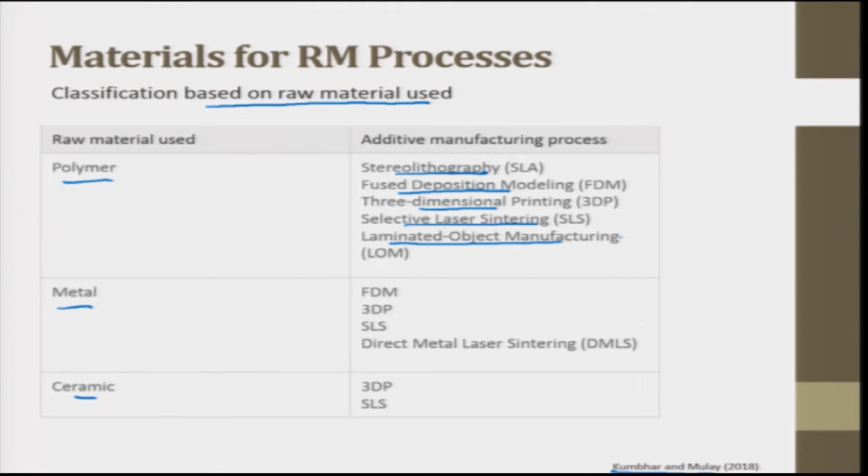This chart is taken from a study by Kumbhar and Mulay, classifying materials based on raw material used: polymer, metal and ceramic. Polymers are used in stereolithography, fused deposition modeling, three-dimensional printing, selective laser sintering, and laminated object manufacturing, where polymer sheets are used. So different processes use different kinds of polymers.

Metals are used in FDM, 3D printing, selective laser sintering, and direct metal laser sintering processes. Ceramics are used in 3D printing and selective laser sintering processes, as discussed earlier when covering materials. Glass is also used here in SLS, so glass falls in this class along with ceramics. In polymers, I can even include composites.

Next is classification based on form of raw material used: liquid, powder and solid. Liquid based processes are stereolithography apparatus and FDM. These use materials like photopolymers, acrylates, epoxies, colorable resins, filled resins, while FDM uses polymers such as ABS, polyacrylate, wax, metals, other ceramics, and PLA.

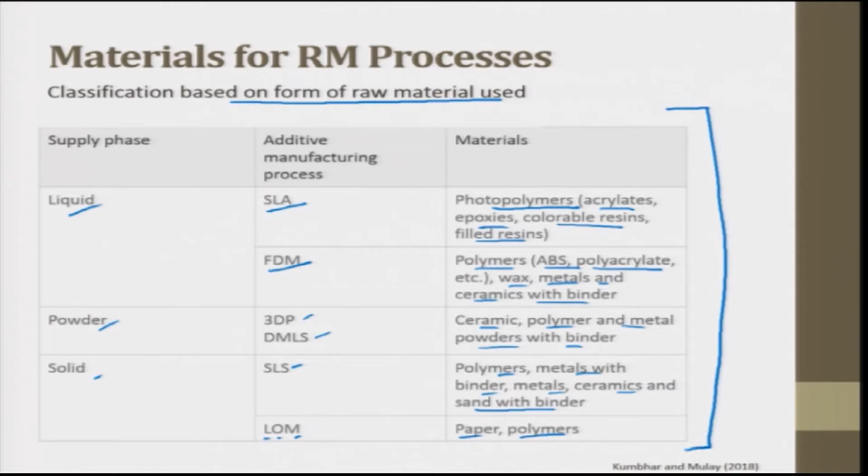In powder form, ceramics, polymers, and metal powders with binder are used in processes like 3D printing and direct metal laser sintering. For solids, polymers, metals with binders, metal, ceramics and sand with binder are used in selective laser sintering, and in laminated object manufacturing papers and polymer sheets are used. This table actually provides the information in a crisp way.

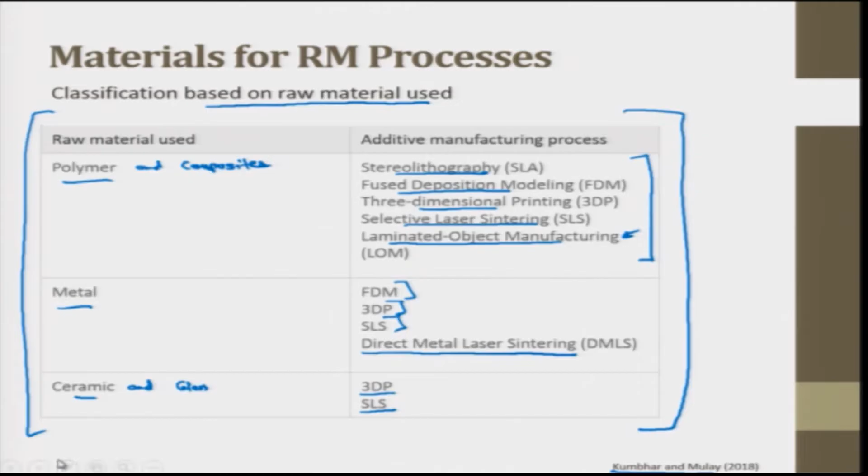Similarly, this one. This was a study taken by Kumbhar and Mulay in 2018, a very recent study.

Next, after discussing materials, let us come back to the enabling features of materials, the binding mechanisms in rapid manufacturing. These binding mechanism techniques are: secondary phase assisted binding, chemically induced binding, solid state sintering, and liquid fusion. We discussed these earlier with the different processes, but to put some light here, since additive manufacturing is only possible through efficient binding of additive layers, the binding technique determines process speed and part properties. Binding can be classified into these four categories.

First, secondary phase assisted binding, which includes adhesive additives. In this category are processes like binder jetting, SLS, sheet lamination, and LOM. These processes use a secondary phase binding material. Secondary binding phases, in the form of liquids or powder coatings, can be added using different techniques such as mixing, coating, and nozzle injection.

Adhesive additives, as 1.1, are used in binder jetting. The adhesive binder can be liquid or dry. A liquid binder, such as some polymer resins or inks, contains all the binding components in the printed liquid. In comparison, dry adhesive can also be added to a powder bed, which binds the powder either physically or chemically after interacting with the deposited liquid. So these are adhesive additives.

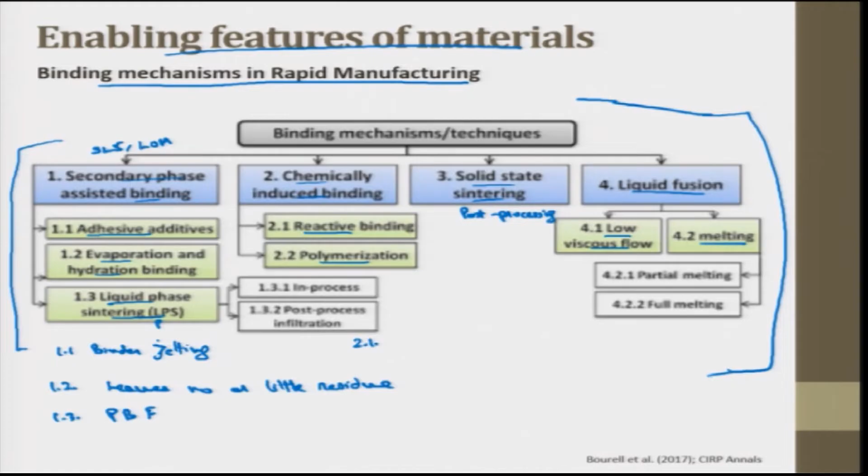This heat source can be laser or EBM. This mechanism can achieve completely dense metals from a single material. So these are certain binding mechanisms we have just recalled, which determine the strength and the type of material that can be used again.

Next, this is an Ishikawa or cause and effect diagram that tells us about all the features to obtain a final rapid manufactured part. This is also called a fish bone diagram. It looks like a fish bone. This is the main bone of the fish, and these are all branches.

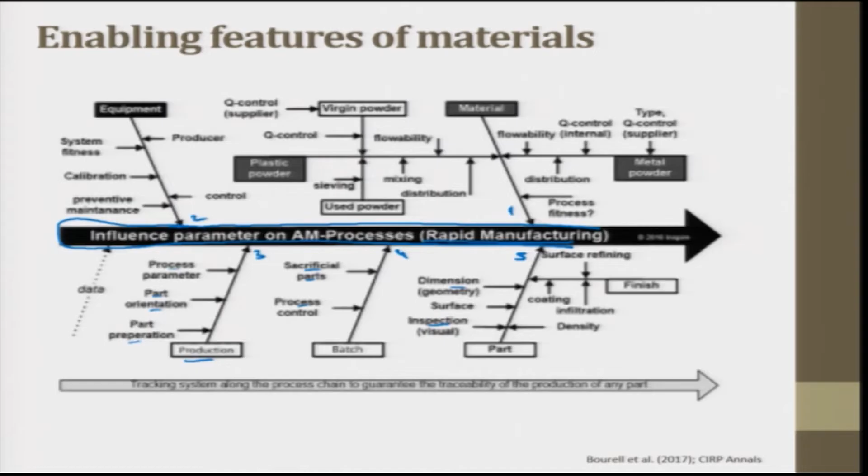These are the major branches, numbered 1 through 5. Number 1 is material, the kind of material - I am more concerned about material here. The main branches are: the part that is to be produced, the surface finish required, the inspection required, then batches and sacrificial parts, then production - in production we have process parameters, part orientation, part preparation. Then in equipment we have system fitness, producer, calibration of the equipment.

Then the major thing we are concerned with here is the material. For material, is it virgin powder or used powder, is it plastic powder or metal powder? We are just talking about powder materials here. In this study, they have taken only powder material. So is it a plastic powder or a metal powder?

If plastic powder, what is the flowability, what is the mixing, what is the distribution, what is the quality control in case of virgin powder? It can also be a used powder. Flowability, quality control, and quality control from supplier, distribution - all these are the concerns in case of metal powder.

So this Ishikawa diagram helps us disseminate the complete process into smaller parts, with further branches and sub-branches all obtained using this diagram. It is one illustration of the rapid manufacturing process, showing the influence parameters on additive manufacturing processes. This is the Ishikawa diagram for that.

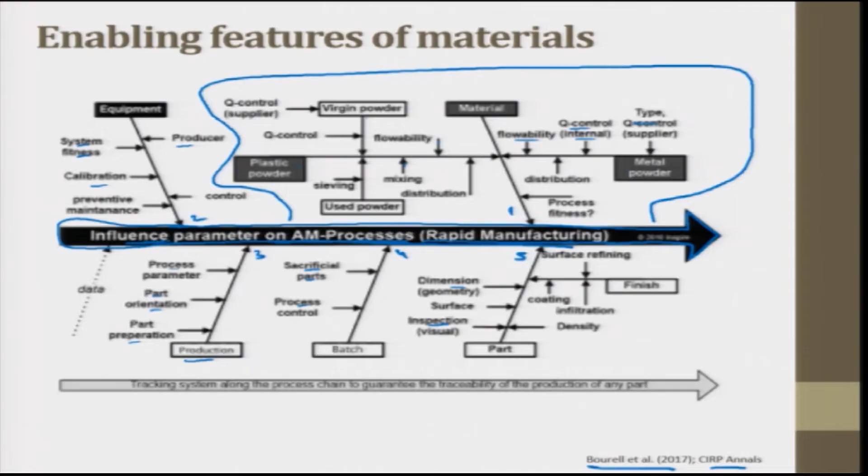Next is properties of rapid manufactured parts - mechanical properties. The in-use properties of the rapid manufacturing part define the scope of applicability of the technology. Parts that are fully dense and homogeneous manifest properties associated with their microstructure. For a number of direct processes, the parts are a solidified structure of polymer or metal, and the associated cast properties are generally obtained. For example, titanium alloy was direct selective laser sintered to create a nominally full dense part.

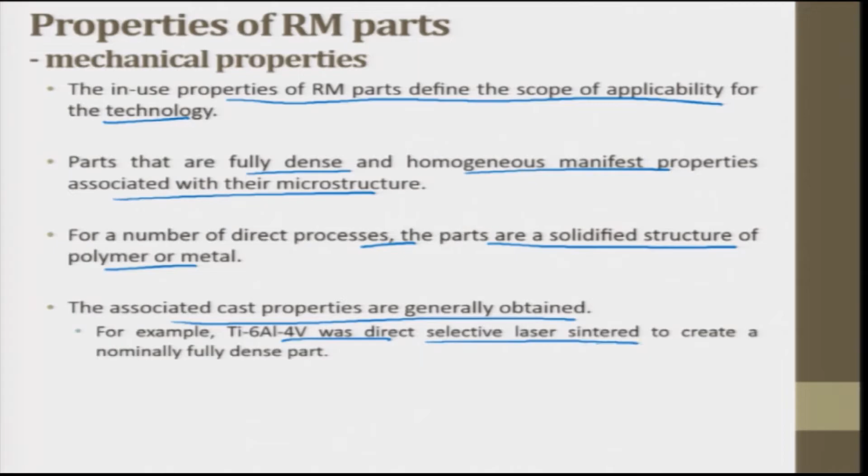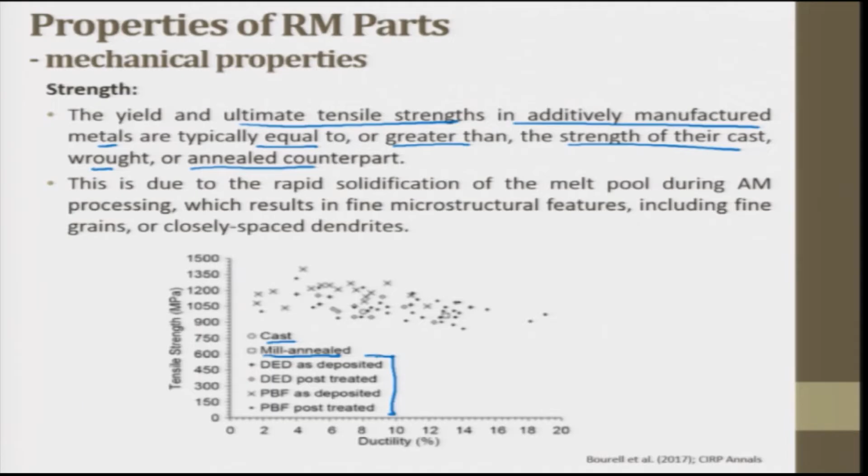So mechanical properties can be divided into categories. The first category is strength. The yield and ultimate tensile strength in additively manufactured metals are typically equal to or greater than the strength of their cast, wrought or annealed counterparts. You can see these are the cast parts, this circle, this square is the mill-annealed part, and these are all the additive manufacturing processes. This is due to the rapid solidification of the melt pool during additive manufacturing processes, which results in fine microstructural features including fine grains or closely spaced dendrites.

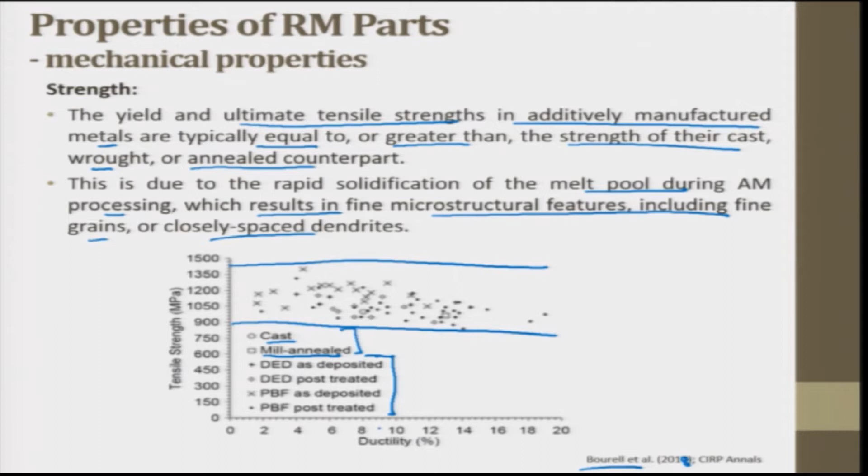This is a study taken by the same researchers in 2018. They have seen that the tensile strength properties lie in this range only for the different parts. So there is not a significant difference in strength between the cast and the mill annealed, generally annealed parts. So this is the strength of rapid manufactured parts.

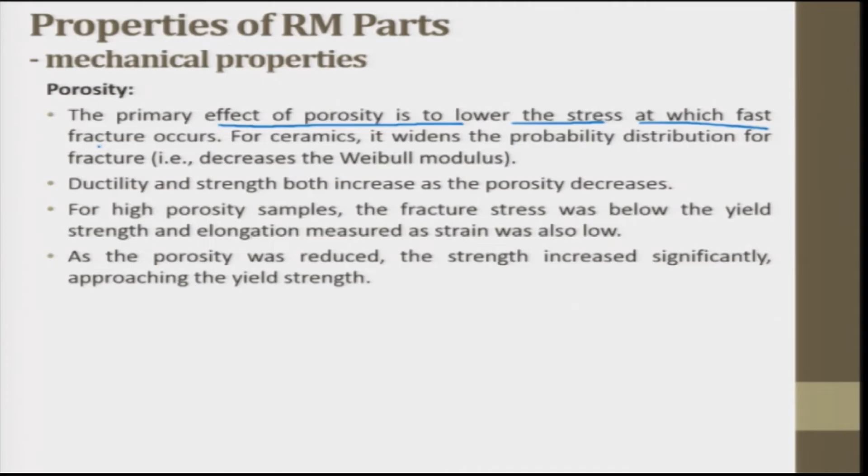Next is porosity. As we have just discussed, the primary effect of porosity is to lower the stress at which fast fracture occurs. For ceramics, it widens the probability distribution for fracture - it decreases the Weibull modulus. Ductility and strength both increase as porosity decreases.

Overlapping stress strain curves for certain parts have shown that the amounts of engineered porosity range from 0 to 40% in rapid manufactured parts. For high porosity samples, the fracture stress was found to be below the yield strength, and elongation measured as strain was also low. As the porosity was reduced, the strength increased significantly, approaching the yield strength. This was again a study taken by Bourell et al.

They had a study on laser sintered polyamide samples with varying amounts of engineering porosity. This porosity ranged from 0 to 40%. So this was the inference they came up with.

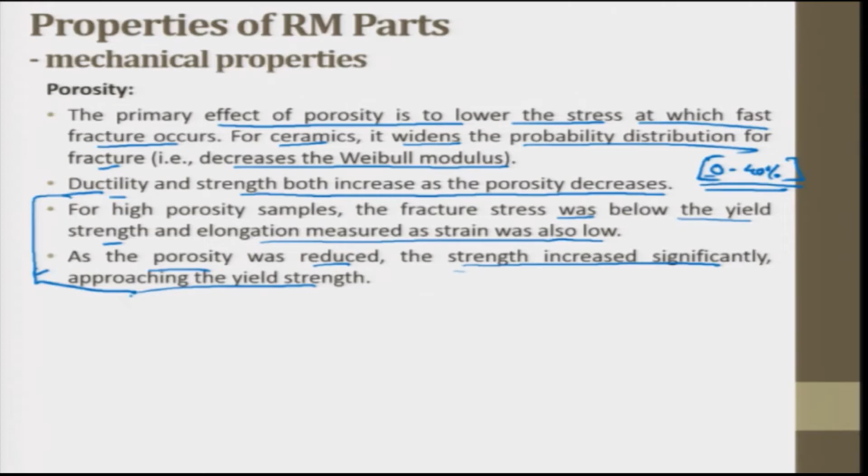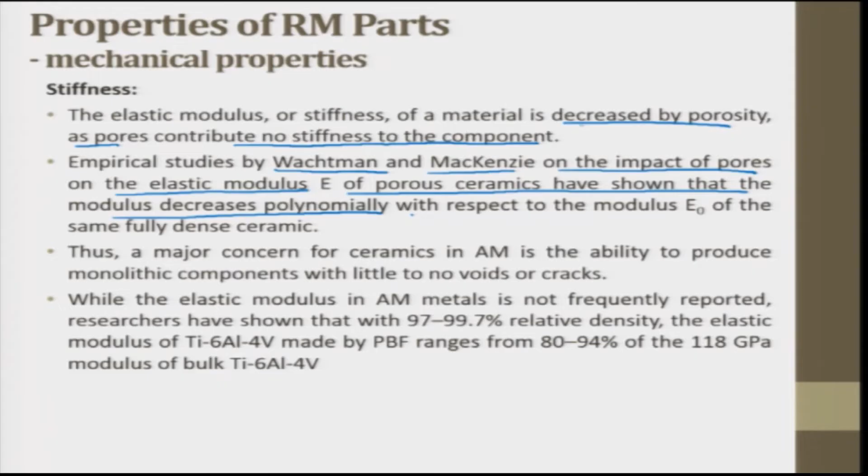Next is stiffness. The elastic modulus or stiffness of a material is decreased by porosity, as pores contribute no stiffness to the component. Empirical studies by Wachtman and MacKenzie on the impact of pores on the elastic modulus of porous ceramics have shown that the modulus decreases polynomially with respect to the modulus of the same fully dense ceramic. Thus, a major concern for ceramics in additive manufacturing is the ability to produce monolithic components with little or no voids or cracks.

While elastic modulus in additive manufacturing metals is not frequently reported, researchers have shown that with 97 to 99.7 relative density, the elastic modulus of titanium alloy made by the powder bed fusion process ranges from 80 to 94% of the 118 gigapascal modulus of bulk titanium alloy.

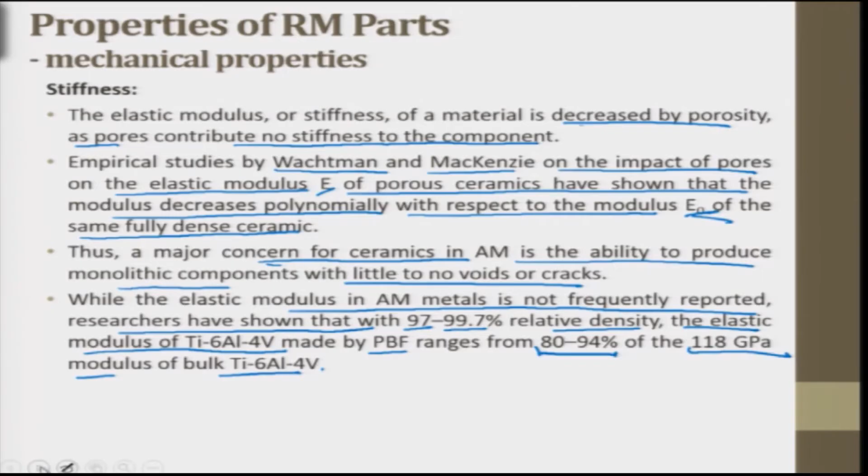So this is stiffness. Next is ductility. Ductility of materials made by additive manufacturing is largely limited by internal defects such as gas entrapment porosity or lack of fusion defects in metals, insufficient interlayer adhesion in polymers, and cracks introduced during sintering of ceramic components.

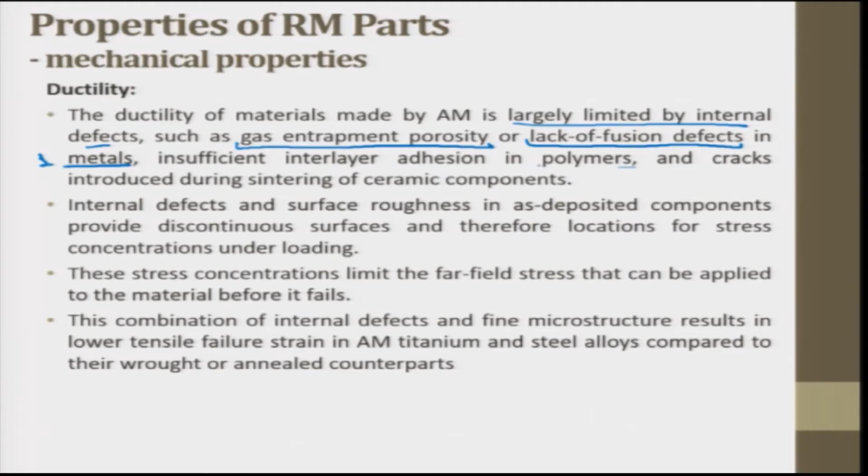So first is metals, second is polymers, third is ceramics. In metals, it is gas entrapment porosity or lack of fusion defects. In polymers, it is insufficient interlayer adhesion, and cracks in ceramic components. These determine the ductility.

Internal defects and surface roughness in as-deposited components provide discontinuous surfaces and therefore locations for stress concentrations under loading. These stress concentrations limit the far field stress that can be applied to the material before it fails. In metallic materials, lack of fusion results in long, sharp pores, which locally amplify the stress in the components.

In addition, fine microstructural features due to rapid solidification lead to increased strength, but reduce ductility due to limited dislocation motion. So this combination of internal defects and fine microstructure results in low tensile failure strain in additive manufactured titanium and steel alloys compared to their wrought and annealed counterparts.

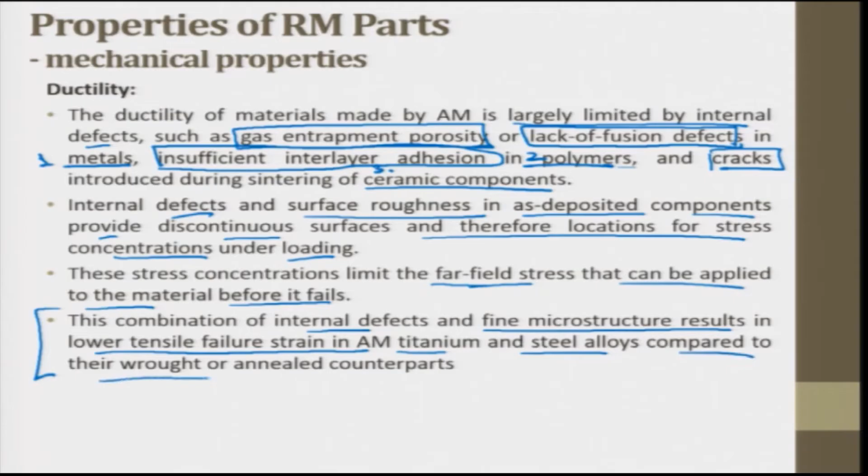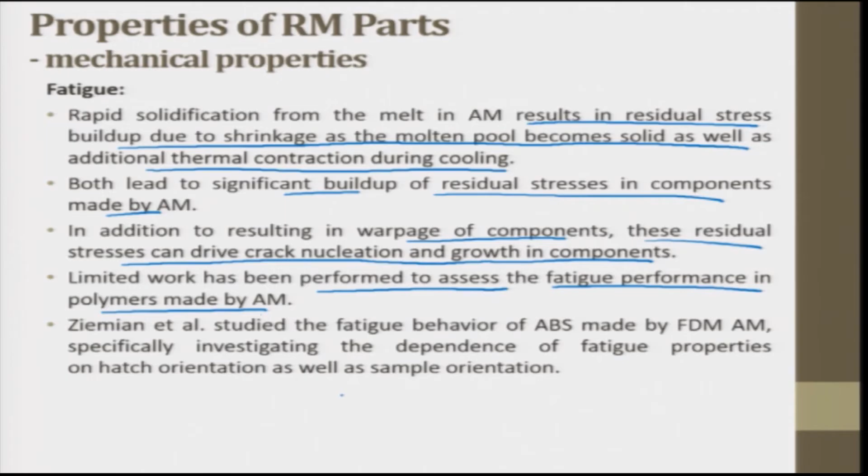Limited work has been performed by researchers to assess the fatigue performance in polymers made by additive manufacturing. Ziemian et al. specifically studied the fatigue behavior of ABS made by FDM additive manufacturing, investigating the dependence of fatigue properties on hatch orientation as well as sample orientation.

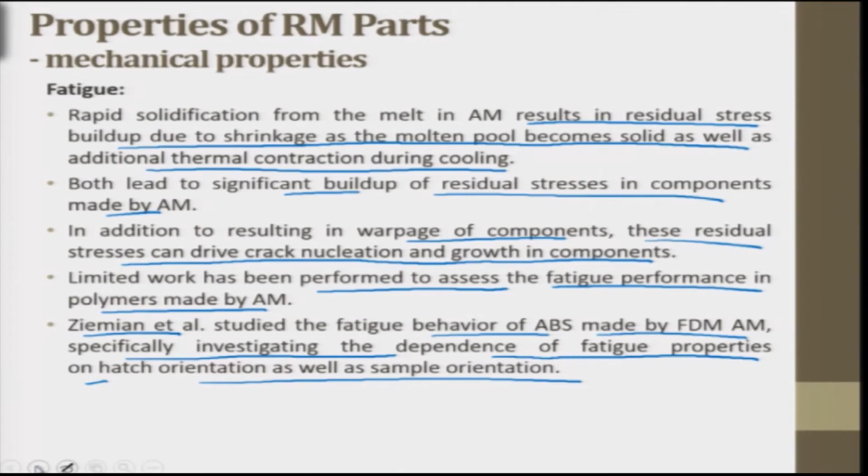Next are the optical properties. The predominance of additive manufacturing literature dealing with optical properties centers on transparency. Vat polymerization has for some time had commercial transparent materials available. Material jetting technologies have also various commercial grades of transparent materials. Other processes such as rapid freeze prototyping are naturally amenable to production of transparent parts in ice.

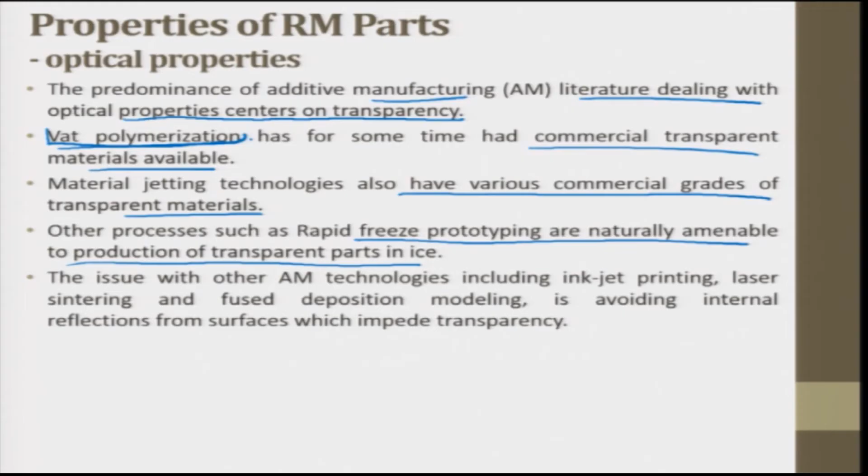Certain approaches have been developed by which transparent quartz parts were produced using a filament side feed mechanism into a laser power source. Certain optical properties lead to optically translucent parts made using vat polymerization.

So they are being used in biomedical applications because of their optical features. An issue with other additive manufacturing technologies including inkjet printing, laser sintering and fused deposition modeling is avoiding internal reflections from the surfaces which impede transparency.

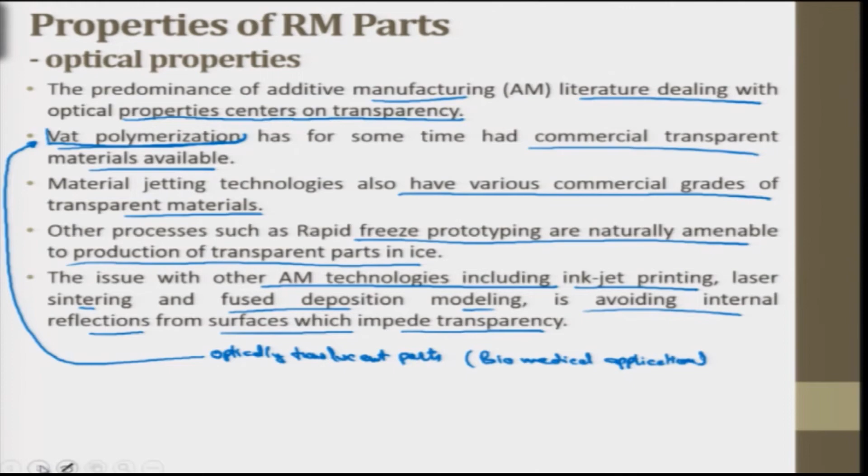So there are certain issues involved with material as well, like reflectivity. As we discussed in the laboratory demonstration, aluminium is a material that is a little bit lustrous, so reflectivity hampers the scanning. But in case of optical properties, sometimes these are beneficial as well. We will discuss the issues in materials and the defects in materials in the next lecture.

So next are electrical properties. The electrical properties of materials are affected by the manufacturing process, since this impacts the final microstructure of the material. Microstructural effects on electrical properties are associated with the mobility of a conducting species, generally electrons. So how electricity moves, this is the general theory in that.

Additive manufactured polymers' interest in electrical properties is generally either to maintain the intrinsic electrical insulating characteristic or to use additives to increase electrical conductivity. Improvements to additive manufactured polymer electrical conductivity can be done by additions of a conductive media such as carbon. Carbon is a great candidate that can help to improve the electrical conductivity.

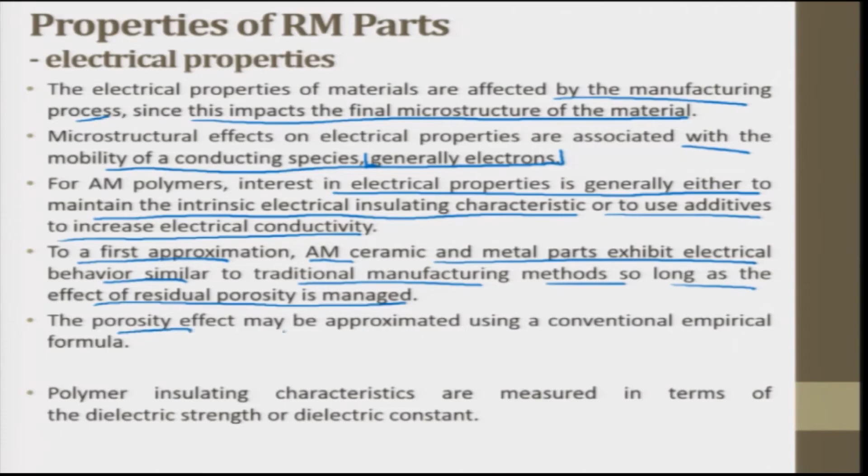To a first approximation, additive manufactured ceramics and metal parts exhibit electrical behavior similar to traditional manufacturing methods, so long as the effect of residual porosity is managed. The porosity effect may be approximated using a conventional empirical formula. Polymer insulating characteristics are measured in terms of the dielectric strength or dielectric constant.

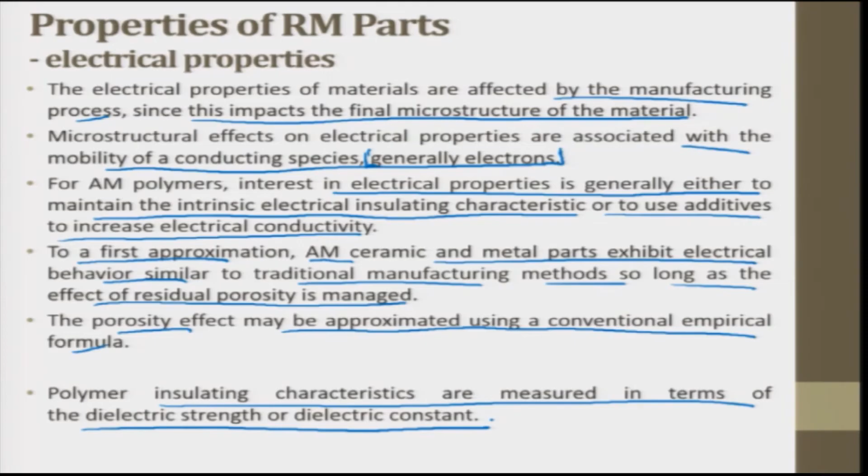So we are not moving into the mathematics or the models to determine the electrical properties and porosity, but yes, porosity is the one that determines electrical property because the flow of electrons has to happen. So carbon or other constituent materials can be added to improve the electrical properties, to get a composite material, and functionally graded materials can also be obtained to have better electrical properties in rapid manufactured parts.

So next is functionally graded materials. As I said, functionally graded materials are a form of composite where their properties change gradually with position. The gradient can be tailored to meet specific needs through the utilization of composite components. The change in the property of the material is caused by a position dependent chemical composition, microstructure or atomic order.

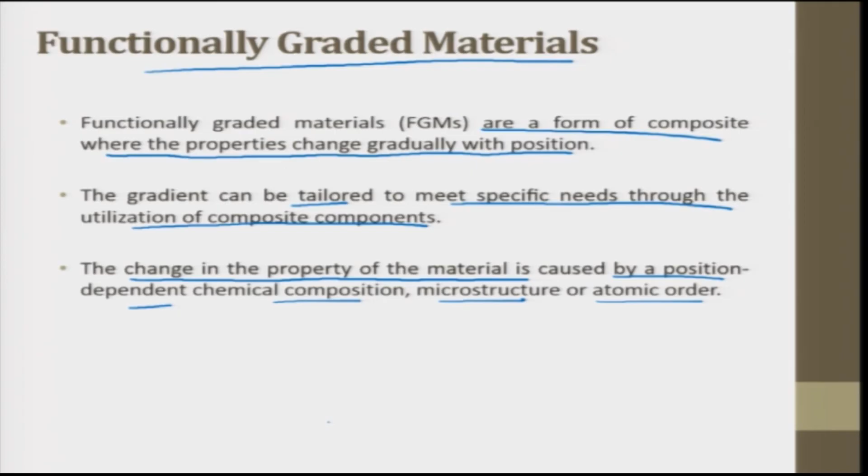Homogeneous material is a complete homogeneous mixture. This type of composite aims to reinforce material properties by mixing a dispersed phase homogeneously within the matrix.

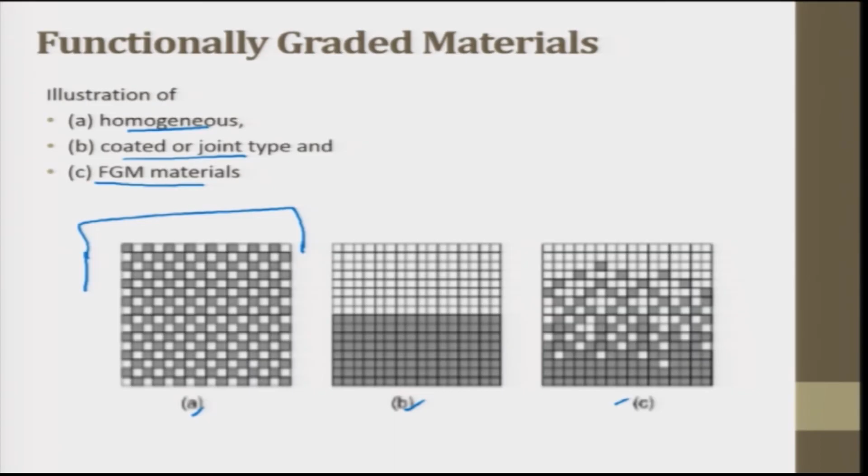The second type, coated or joint type, is characterized by having different material characteristics on separate surfaces or separate parts, such as a surface and a core. Typical examples are coatings that enhance surface properties. However, the sharp boundary existing within the structure often exhibits various adverse effects on material properties.

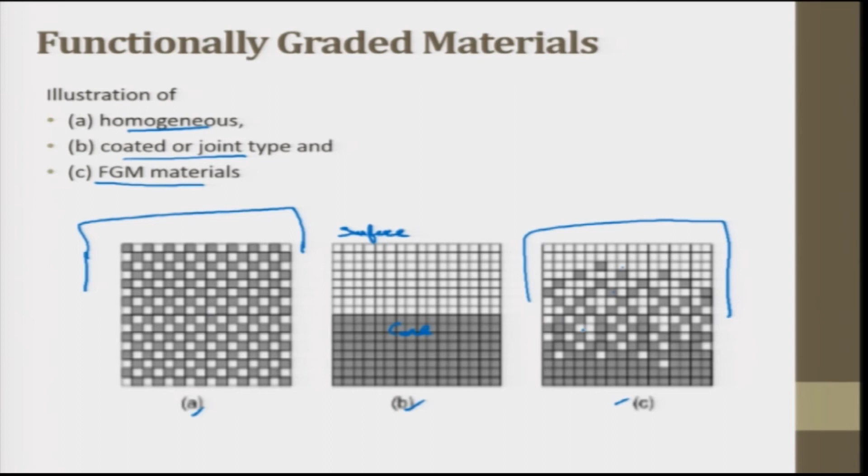Functionally graded materials are the third option. They have gradually varied composition between different constituents. You can see the composition between the white and black boxes, which are different materials, is varied gradually. This eliminates the mismatch of material properties, so thermal or residual stresses in the parts that may cause fatigue can be significantly decreased.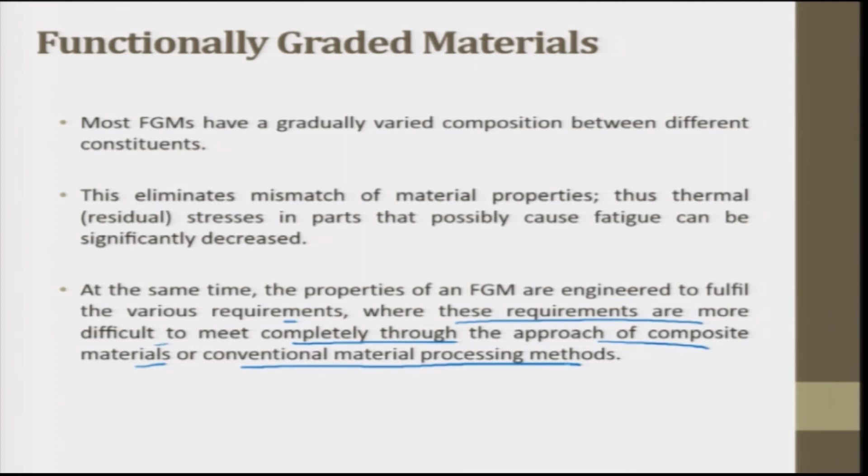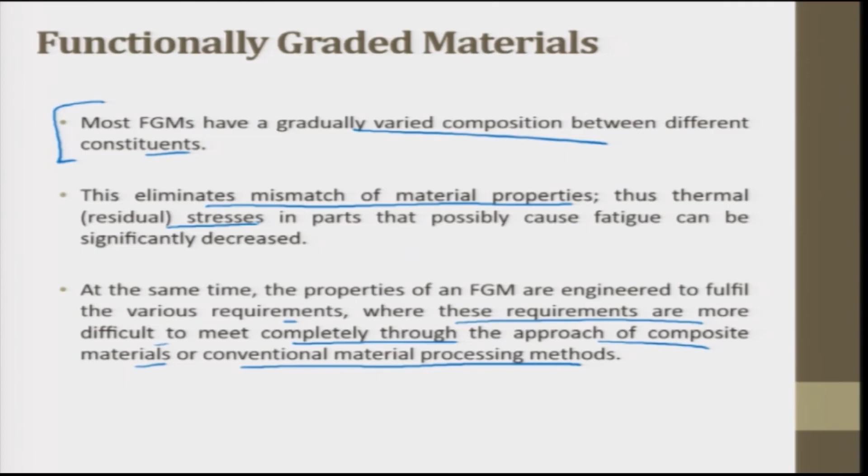At the same time, the properties of functionally graded materials are engineered to fulfill various requirements, which are more difficult to meet completely through the approach of composite materials or conventional material processing methods. So FGMs have varied composition between different constituents, which eliminates the mismatch of material properties. Thermal stresses are then reduced, so fatigue is lesser.

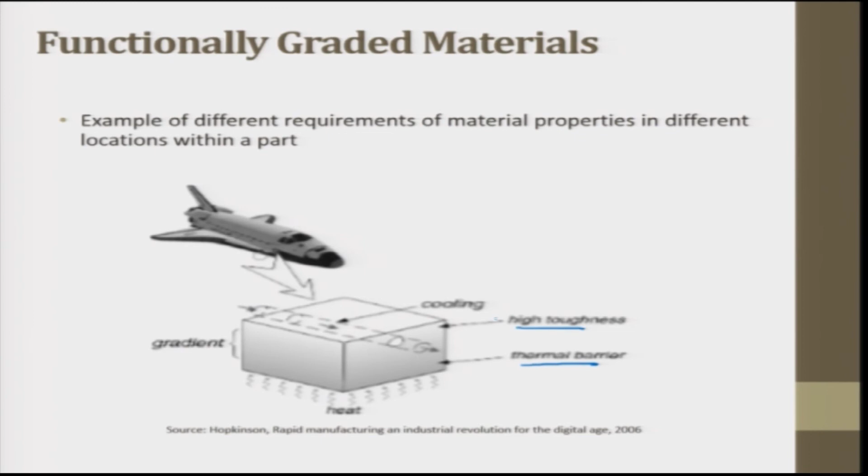Here is an example of different requirements of material properties in different locations. For instance, a gradient material is used in the fin of an air jet, where it has different properties: this is a gradient, this is a thermal barrier, this is high toughness, and this is cooling. Because of this, the cooling happens. These are the kinds of applications where FGMs can be used.

Now, FGMs can be obtained using conventional techniques and rapid manufacturing techniques. These techniques we have discussed in the course: fusion, laser sintering, microwave sintering, laser cladding, LPS (liquid phase sintering), all those processes. Conventional techniques are generally constructive and transport-based.

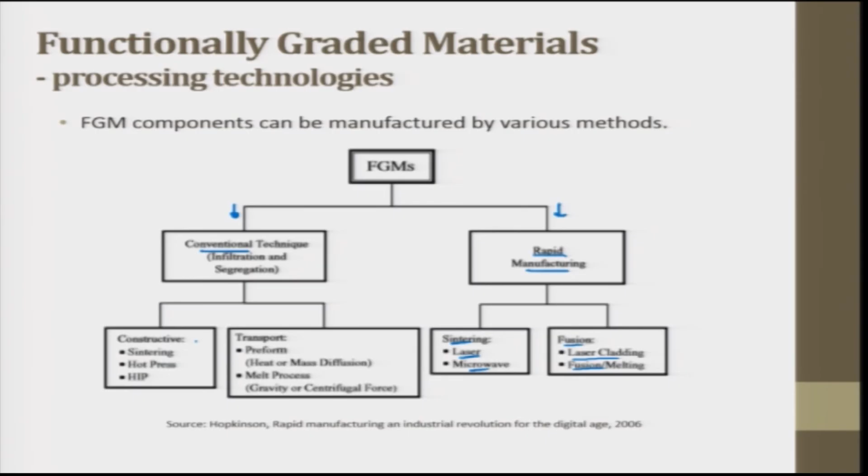Just to have a quick glance, the conventional constructive processes are based mainly on powder densification or sintering techniques and coating processes. This can be divided into two parts: bulk processing and layer processing.

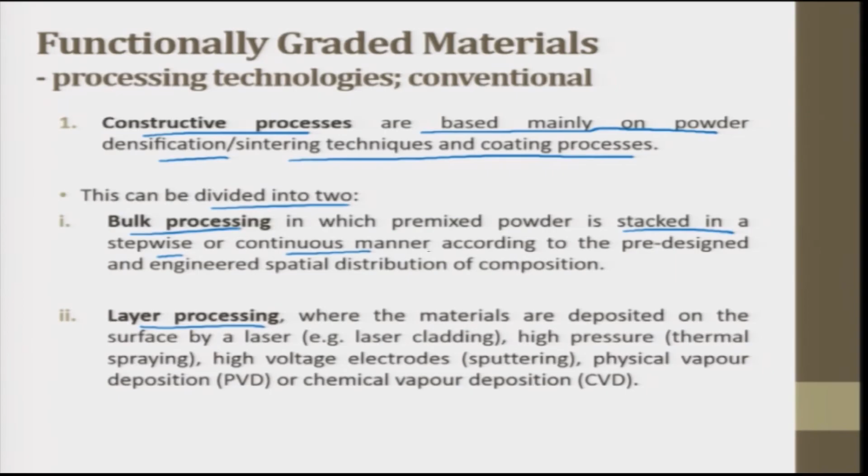Bulk processing is one in which pre-mixed powder is stacked in a stepwise or continuous manner according to the pre-designed and engineered spatial distribution of composition. In layer processing, materials are deposited on the surface by laser cladding, high pressure thermal spraying, high voltage electrode sputtering, physical vapor deposition, or chemical vapor deposition. So this is the constructive process.

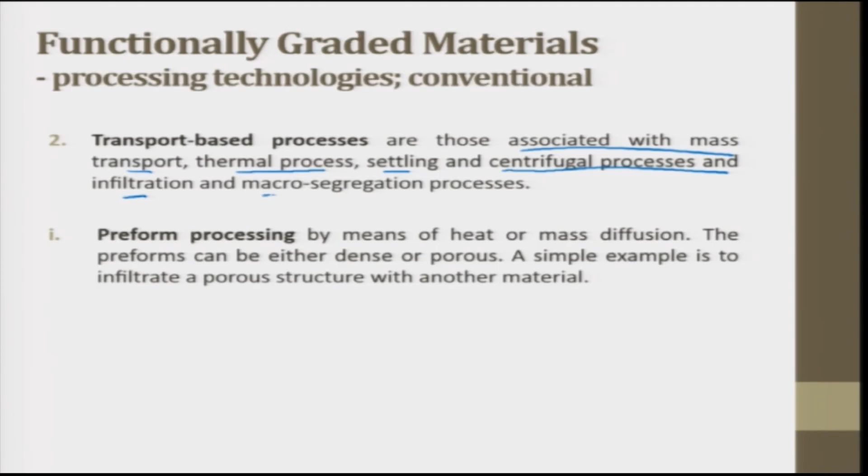Transport-based processes are those associated with mass transport thermal processes, settling, centrifugal processes, and infiltration and macro segregation processes. In bulk processing, HIP, hot isostatic pressing, can also be one of the processes.

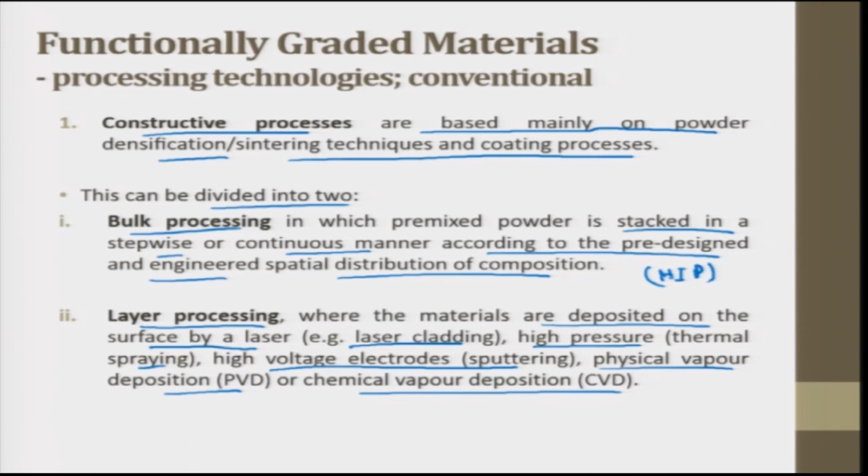In transport-based processes, one of the processes is the preform process, which works by means of heat or mass diffusion. The preforms can be either dense or porous. A simple example is to infiltrate a porous structure with another material. So this is one of the FGM processes.

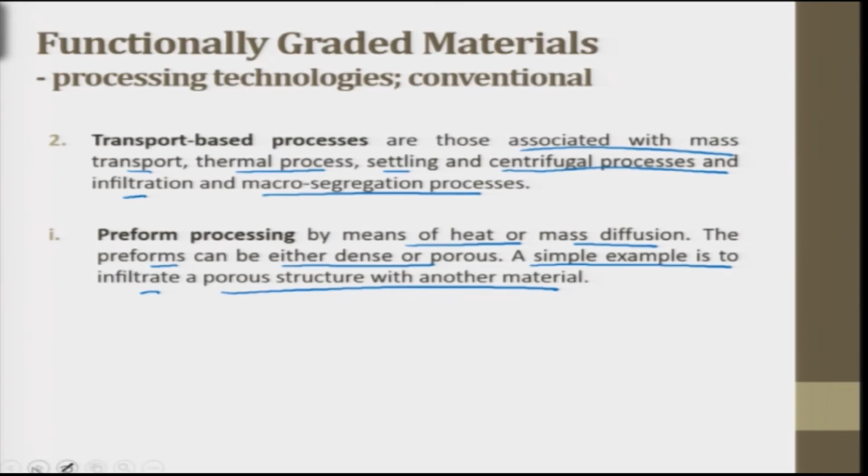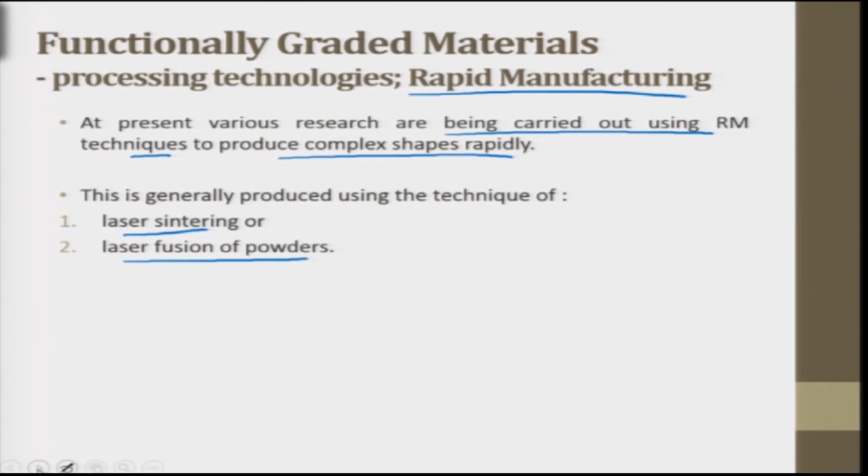Now, rapid manufacturing processes are laser sintering and laser fusion of powders. At present, various research is being carried out using rapid manufacturing techniques to produce complex shapes rapidly. These are the two major techniques which we have discussed in previous lectures as well.

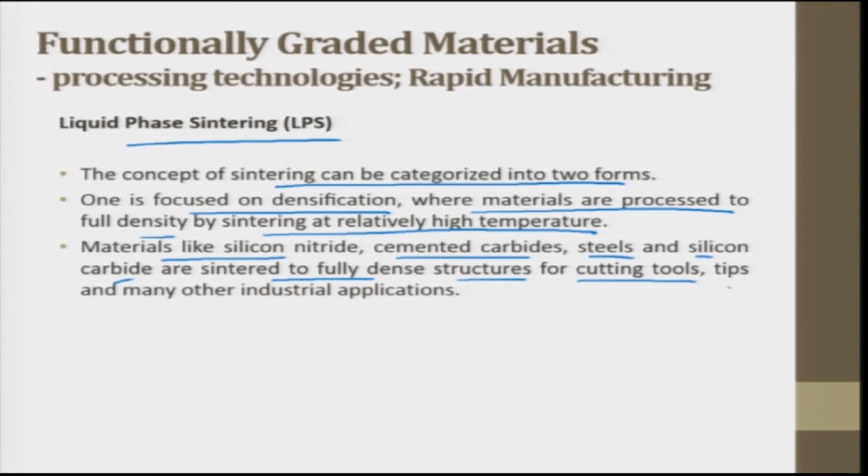In liquid phase sintering, just to recall, the concept of sintering can be categorized into two forms. One is focused on densification, where materials are processed to full density by sintering at a relatively high temperature. Materials like silicon nitride, cemented carbides, steels and silicon carbide are sintered to a fully dense structure for cutting tools, tips and many other industrial applications.

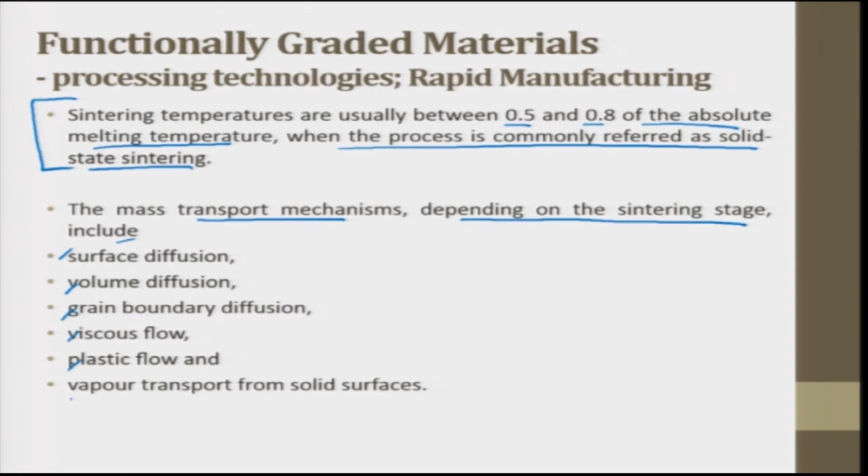There are certain factors or mechanisms that make the process different. Sintering temperature is usually between 0.5 and 0.8 of the absolute melting temperature, when the process is commonly referred to as solid state sintering. The mass transport mechanisms, depending on the sintering stage, include surface diffusion, volume diffusion, grain boundary diffusion, viscous flow, plastic flow, and vapor transport from solid surfaces.

So these are functionally graded materials. I did not discuss much about them, but definitely we can provide you with notes to read about these. These are the materials which are also manufactured using rapid manufacturing processes.

So this was all on materials in rapid manufacturing. We saw the raw materials used in rapid manufacturing, the properties of rapid manufacturing parts and materials, and what functionally graded materials are. In the next lecture, we will discuss post-processing concerns.

Pre-processing happens before actually manufacturing the product; that is some processing that has to happen, such as preparing powders or grinding powders to smaller sizes. Those are our pre-processing. During processing covers all the rapid manufacturing processes we have discussed.

Post-processing is needed because sometimes defects are there. First I will discuss defects that occur in rapid manufacturing parts. Then, to counter those defects and get good surface finish, to enhance properties, and to enhance aesthetics or appearance, there are certain post-processing methods. We will discuss those in the next lecture. Thank you.